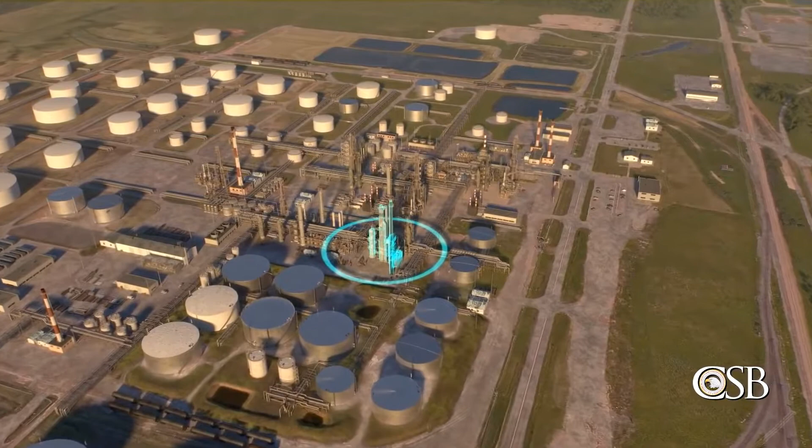April 26, 2018, the Husky Superior Refinery in Superior, Wisconsin. At 5:40 a.m., operators took steps to shut down the refinery's fluid catalytic cracker, or FCC unit, for periodic maintenance and inspection. The FCC unit uses heat and a solid catalyst to break or crack heavy hydrocarbons from crude oil into smaller hydrocarbons, which can then be blended into gasoline and other products.

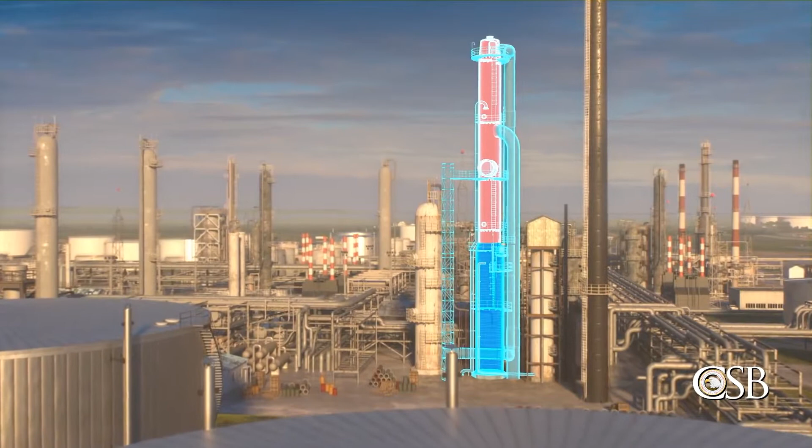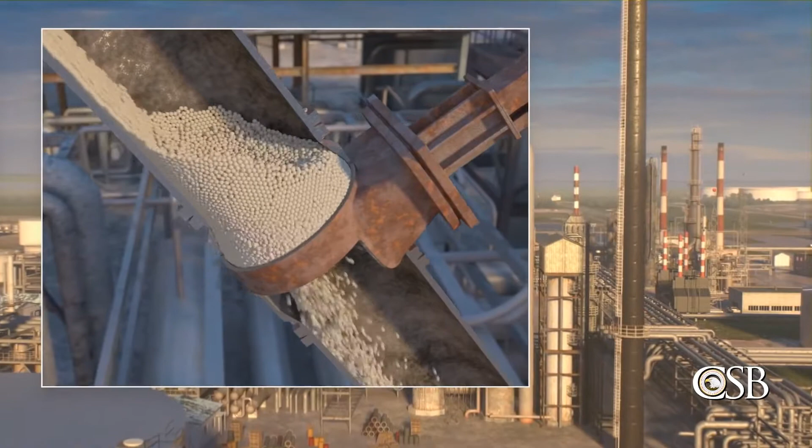Slide valves control the flow of catalyst between a reactor, which contains flammable hydrocarbons, and a regenerator, which contains air. It is important to prevent mixing the hydrocarbons and air, since if they mix, a dangerous explosion can occur. To avoid this hazard, the slide valves maintain a catalyst level between the reactor and regenerator, which acts as a barrier.

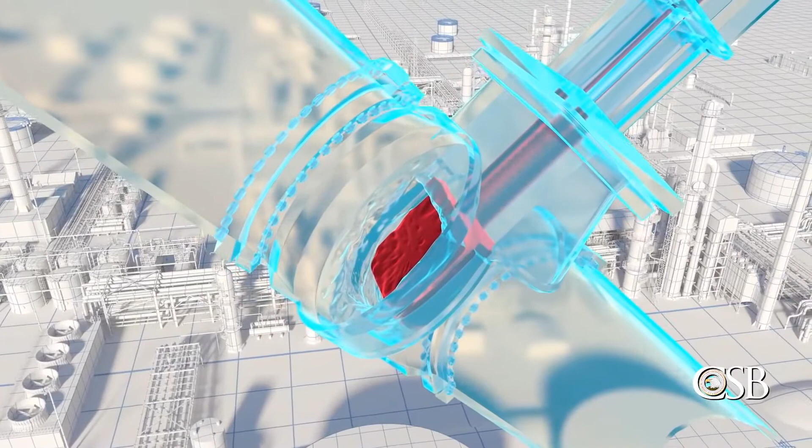To initiate the shutdown of the FCC unit, refinery workers stopped the flow of hydrocarbons to the unit and closed the two slide valves connecting the reactor to the regenerator. But unknown to the workers, one of those slide valves was eroded, and even though it closed, it could not maintain a catalyst barrier in the reactor. As a result, the catalyst from the reactor fell through the valve to the regenerator, leaving no protective barrier between the two pieces of equipment.

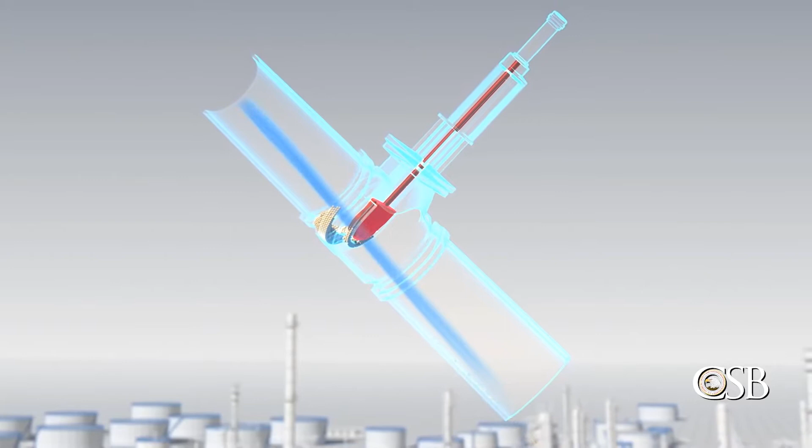This allowed air from the regenerator to flow backwards through the slide valve into the reactor, and then into equipment downstream of the reactor, which contained hydrocarbons, forming a flammable mixture. At approximately 10 a.m., the hazardous mixture of air and hydrocarbons found an ignition source, and there was a large explosion.

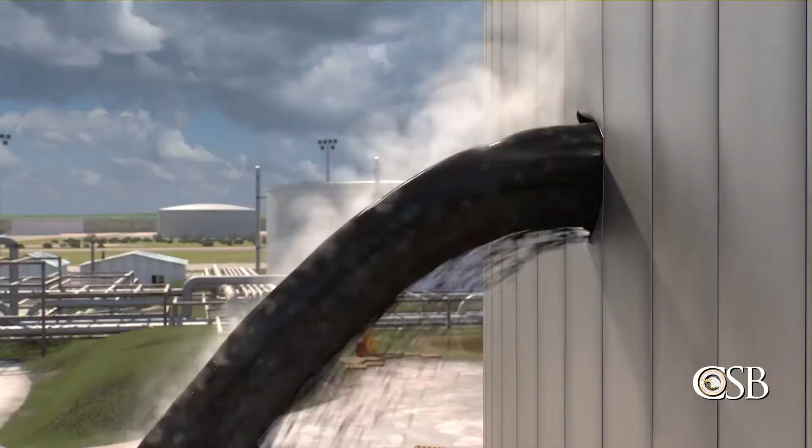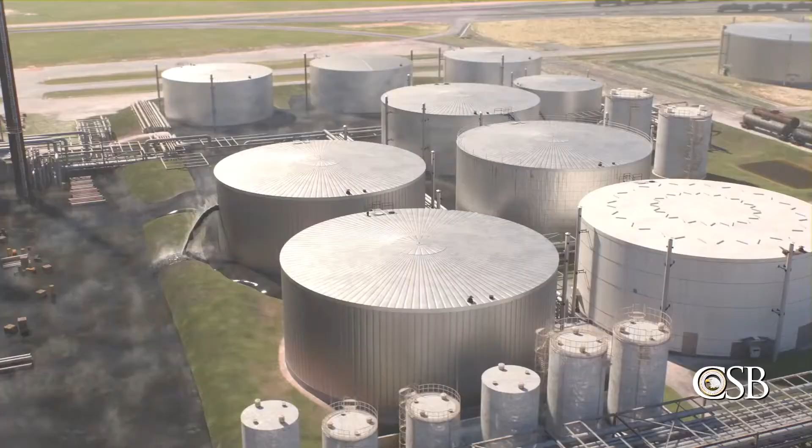Debris from the explosion flew about 200 feet and hit a large above-ground storage tank, puncturing the side of the tank and releasing hot asphalt. Asphalt poured out of the tank over the containment berm and into the refinery's operating units, where it spread along the ground. At around 12:15 p.m., the released asphalt ignited near the storage tanks, and a fire broke out. The fire traveled along a stream of asphalt to the refinery's crude and FCC units.

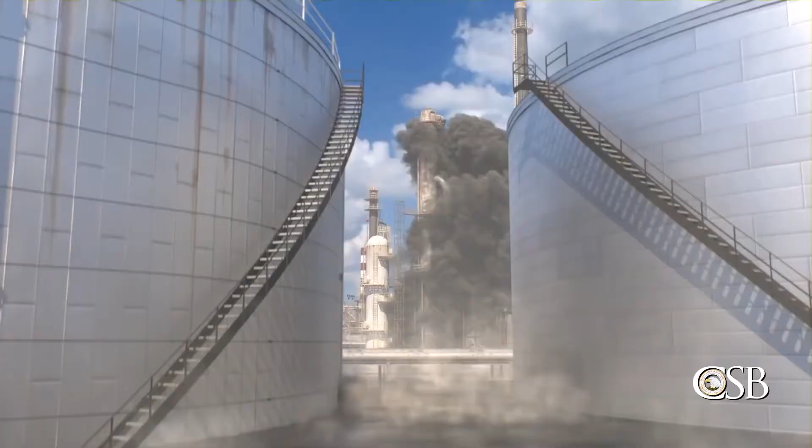The fire produced a huge plume of black smoke, leading to the evacuation of a portion of the town of Superior. Typically, this type of asphalt fire can burn for days. A plan to extinguish the fire was developed by the refinery's emergency response team. Around 3 o'clock, they began to address the asphalt fire together with the Superior Fire Department.

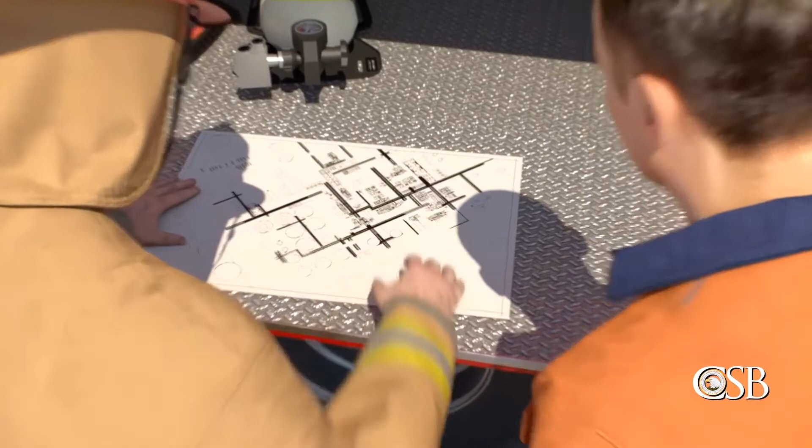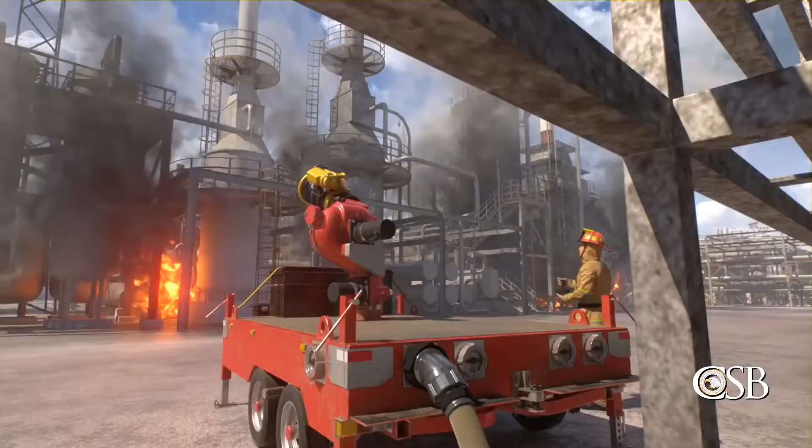A fire truck drove to the edge of the crude unit, and emergency responders sprayed dry chemical fire extinguisher inside to fight the fires that had broken out there. Responders also used two stationary hoses called monitors to shoot water into the crude unit in an attempt to extinguish the flames. While these fires were being put out, over by the storage tanks, emergency responders began to approach the large area of burning asphalt.

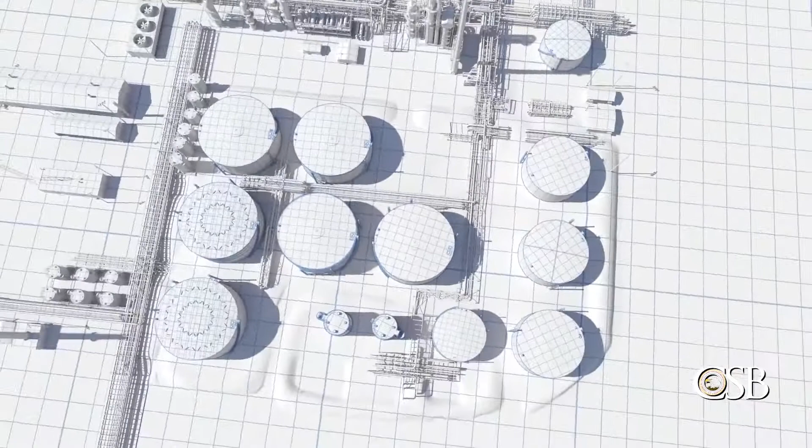The emergency responders' plan was to push the asphalt fire into an empty area near the storage tanks, and then aggressively attack the fire from multiple directions. First, they used two monitors, one to the north and another to the west, to sweep water to push the asphalt fire toward the designated containment area. Then, when the fires within the refinery's units had been extinguished, the fire truck relocated so that it could spray the burning asphalt in the containment area with foam from the east.

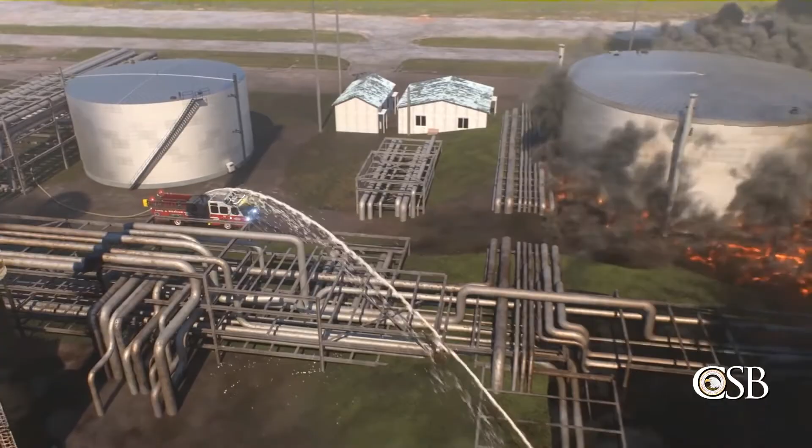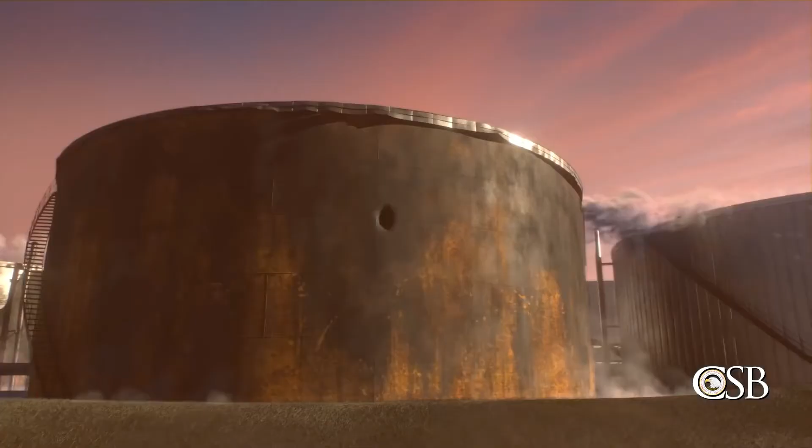Around 5:30, an additional team began to attack the fire from the south, spraying foam from a monitor. At this point, the asphalt fire was completely surrounded within the containment area. With the fire contained, emergency responders were able to put out the asphalt fire at around 7 p.m. The asphalt fire had been extinguished in a matter of hours, as opposed to days, as had been initially feared. The evacuation order was lifted, and Superior residents were allowed to return home. Nevertheless, 36 Husky employees and contract workers sought medical attention for injuries.